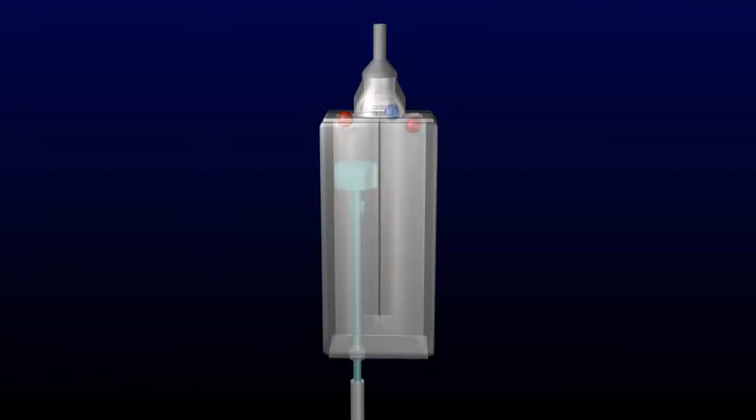This video presents a new invention on various revolutionary fluid currents energy converter devices by combining double-acting fluid pumping apparatuses and moving pontoon and racks to convert ocean waves or flowing currents into electricity. The two fundamental mechanical devices are the movable device and the fixed device.

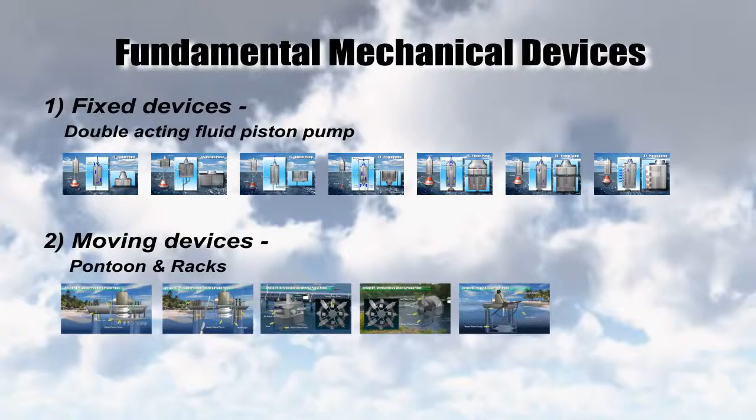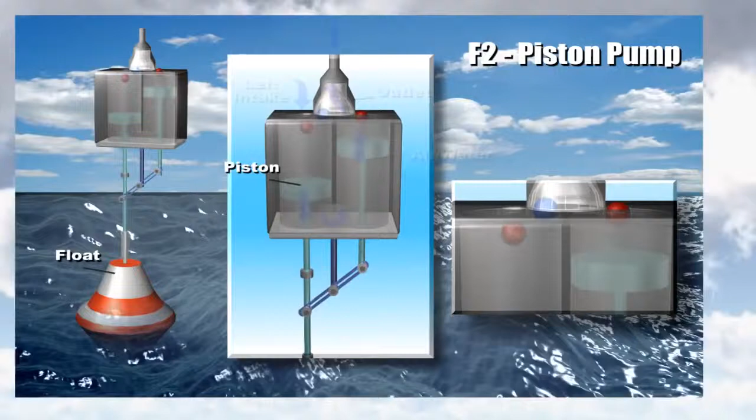Double-acting piston pump: a piston is arranged to reciprocate as its piston rod is actuated by a float. When the float moves up as a rising wave passes, it pushes the piston upward and the resulting dynamic flow of the fluid closes the left inlet by the ball and fluid is pumped out through the center top outlet. At the same time, it causes fluid to flow through the right-hand inlet into the chamber.

When the float moves down, it pulls the piston downward and a partial vacuum generated at the left-hand inlet causes the top left ball to open and allow the fluid to flow in. At the same time, fluid pressure on the lower side of the piston becomes higher and it causes fluid to flow through the bottom channel into the right-hand chamber and pump out through the center top outlet.

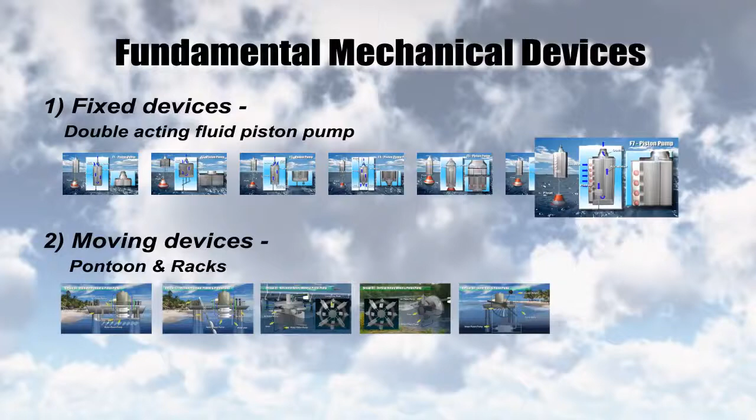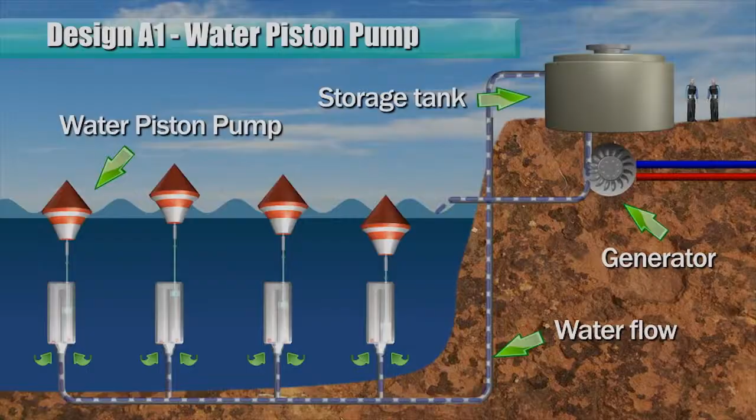Based on the fundamental piston reciprocating working principle, many designs of energy converter can be configured. In this example, a submerged pump is operated to pump water to an elevated storage tank. Water from the storage tank is channeled to rotate a fluid motor or a turbine, which in turn rotates a generator to produce electricity. An air piston pump is disposed above the water level.

The accumulator and flow control valve help to maintain a more constant airflow to drive a turbine and a generator. This design is integrated to operate both air and water piston pumps.

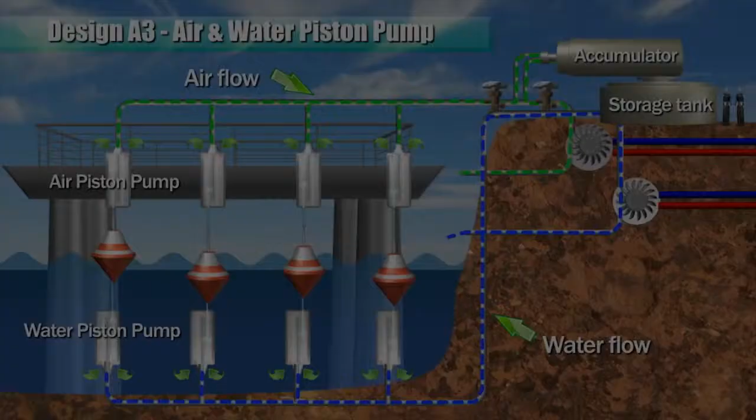Each pump body is configured to include two actuator T-bar piston pumps being arranged end-to-end with a sealed turbine disposed in between.

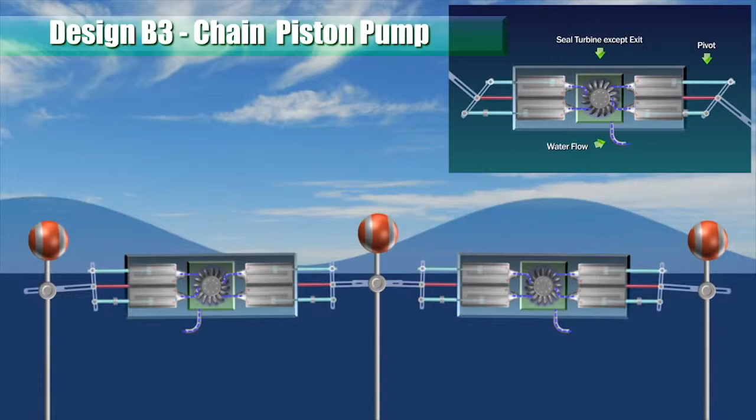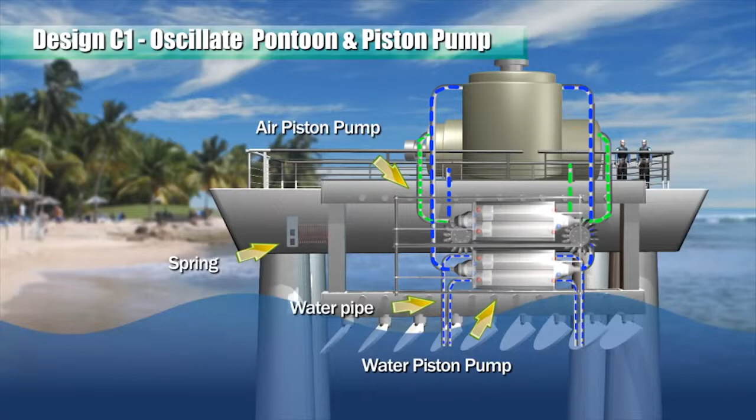The piston of two pumps is interconnected and is linked to a floating pontoon. Now a paddle is pivoted on the pontoon such that when the ocean undercurrents oscillate the paddle, it reciprocates two pistons to pump air and water in a double-acting manner. This design oscillates the actuator T-bar.

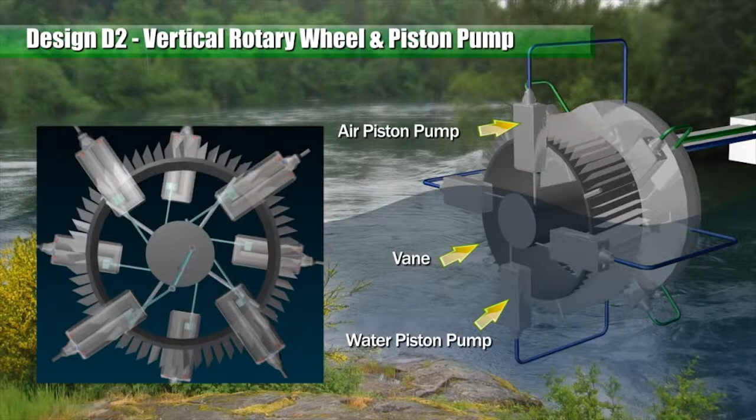On the top side of the rotary wheel, there is a crank pin or shaft that is located at a radius from the center of the rotary wheel. The piston rods of the pumps are separately connected to the crankshaft through two link bars. The vertical rotary wheel has a plurality of peripheral aerofoil vanes and is partially submerged in a body of running water to catch the running currents and rotate.

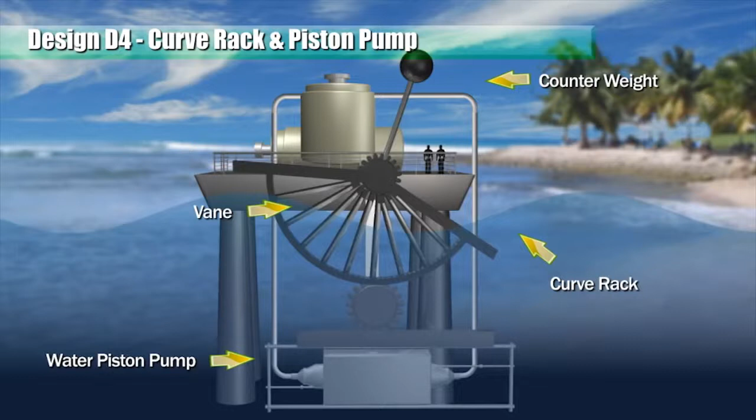This design is deployed in the seabed. When water currents flow through the face of the pendulum member, a lifting force is generated and the pendulum member swings and oscillates.

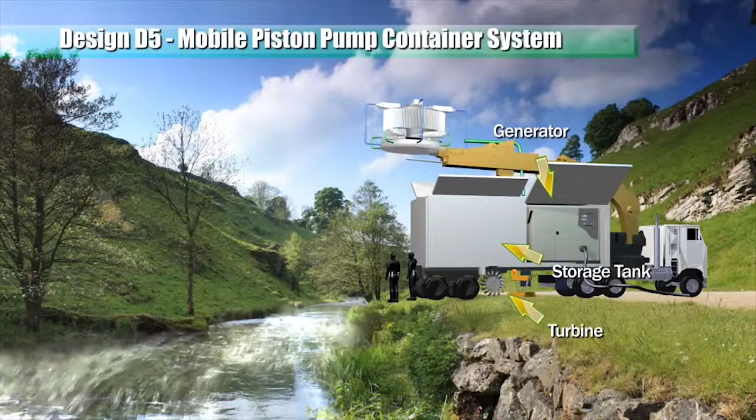This rotary wheel and piston pumps assembly is suspended from a boom on a mobile trailer.

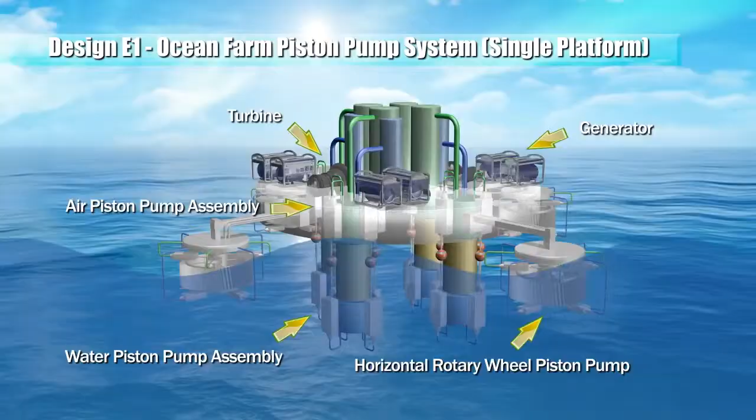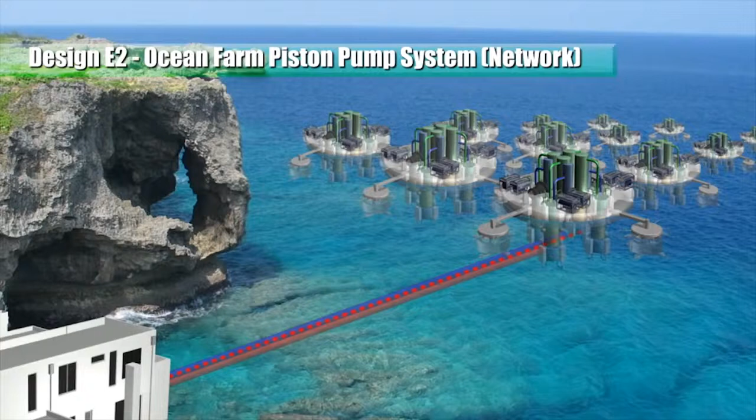A plurality of one or more of the above piston pump configurations can be connected in a network. An ocean farm system comprises a number of network combinations of the above devices, be they the same, mixed, or different configurations, being linked mechanically or electrically.

This concept design is simple and unsophisticated, thus allowing us to harness huge unlimited renewable energy from our surroundings. If you can solve the power, you can solve almost anything.